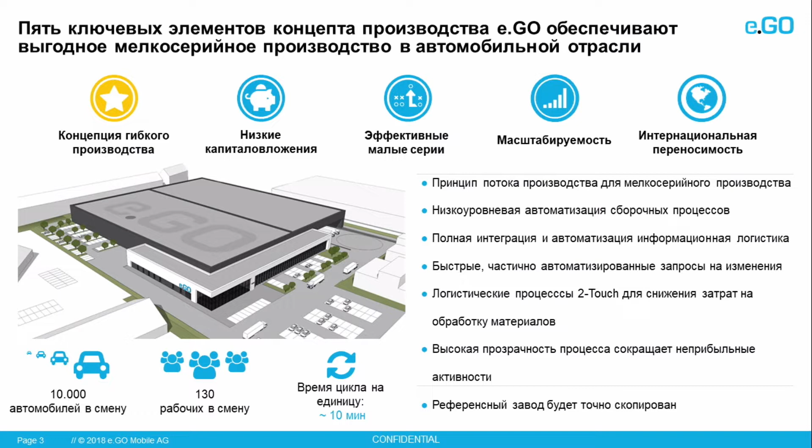In different stages of your production planning project, you need different tools. So as I mentioned this morning, it's okay in the beginning to have a very simple tool. We do a lot of workshops with our customers which are paper-based, which is a creative process.

We discuss a lot. We don't need any IT system there. We only document, and then we try to transfer this into PowerPoint layouts. We just move quickly the different elements, and we start to build a production concept. This is very simple, and you don't need a highly sophisticated IT system behind that.

But on the other hand, we also have participating methods, for example, where we do some very fast modeling of what the customer actually needs. Then we have like a table, and you can work with this table and show the layout to, for example, people working in your production line, and they can move objects, they can improve, and you can develop a layout out of this. This is already the second step. It's also a tool we use in our daily projects.

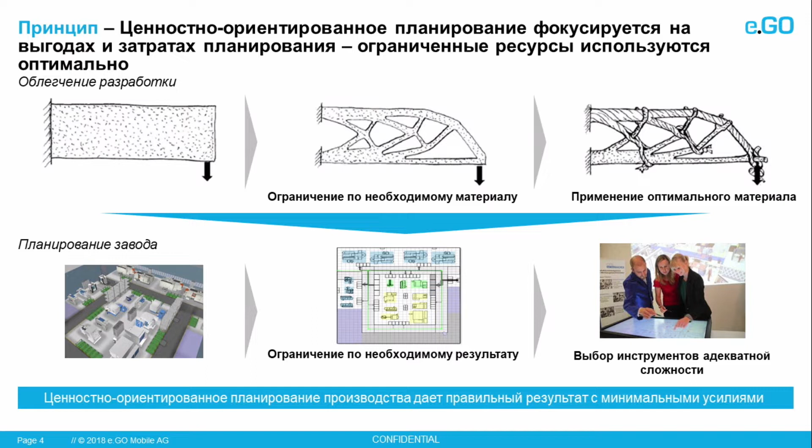This is our assembly line. We will see this assembly line later, our rear axle assembly, in virtual reality. But as you see in the beginning, our models are very simple. It's not like the nice pictures I showed this morning. This is nice for presentation, but the reality we work with looks like this.

We have the building structure already because this is already built, but the production line was empty at this time. There was nothing built, but we had the model.

We didn't know how this station exactly looks like, but we used simple blocks to just block this area. So we already knew, okay, we can't move there, we can check if we can see each other, if you have the material supply planned, and so on. So it's a very rough level of detail. And during our process, it's getting more and more detailed.

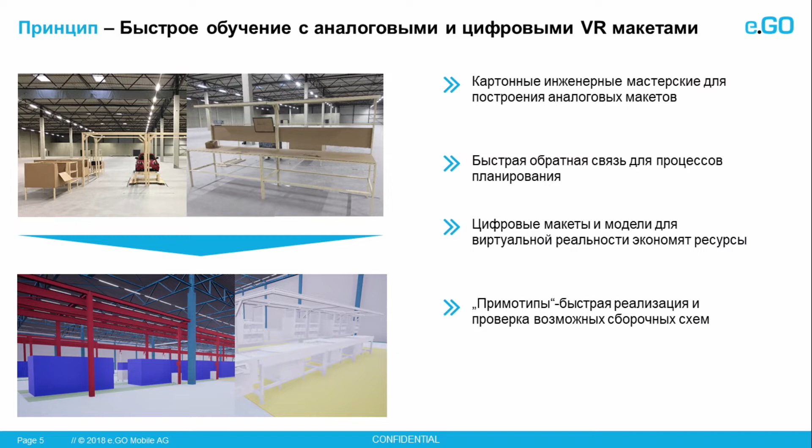The next step is that we get first data from the supplier. This data is integrated from our assembly line supplier. As you see here, this is not a very high level of detail, it's not very colorful, just white, and we placed it here. But in Navisworks, which I'll show later, you have the opportunity to walk around, use the walkthrough function, and we already checked if it's in the right place.

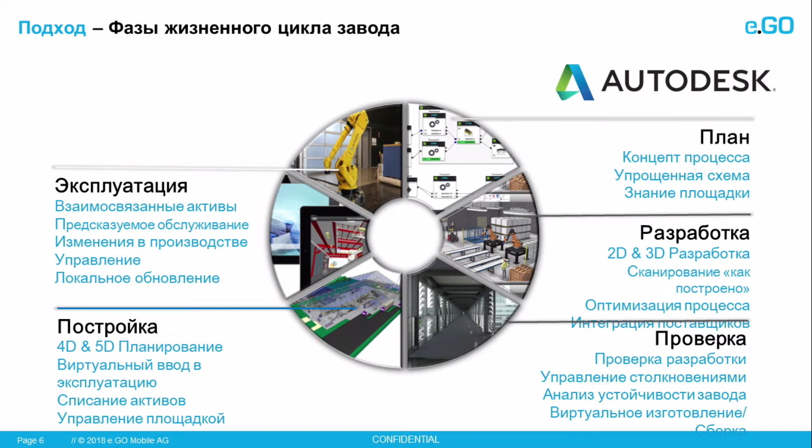Now I will show you different examples for each of these phases and how we actually use it.

First, before we use AutoCAD, we do a lot of workshops and concept work. We do this on paper or with PowerPoint, or our planning table - very simple tools to plan the first layout. Then we integrate this into AutoCAD.

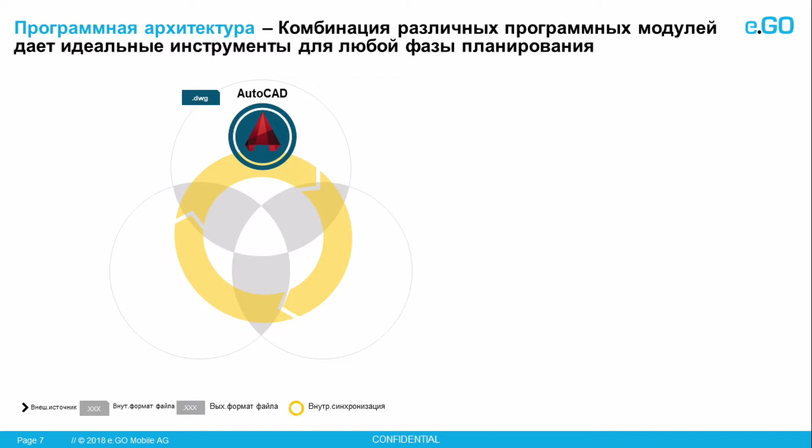It's always two-dimensional, just areas, space, and layout management planning. This is the basic work you have to do, and most of you do this today as a factory planner or industrial engineer. This is normal work.

Then in a second step... a little bit slow.

So then we still use a Factory Design Utilities. We have all the elements in there. We use these elements, we get the data from suppliers, and we model our own elements, but there's also a big database from Autodesk provided with the Factory Design Utilities. We use these models to generate better layouts in the end, and to start with the 3D planning.

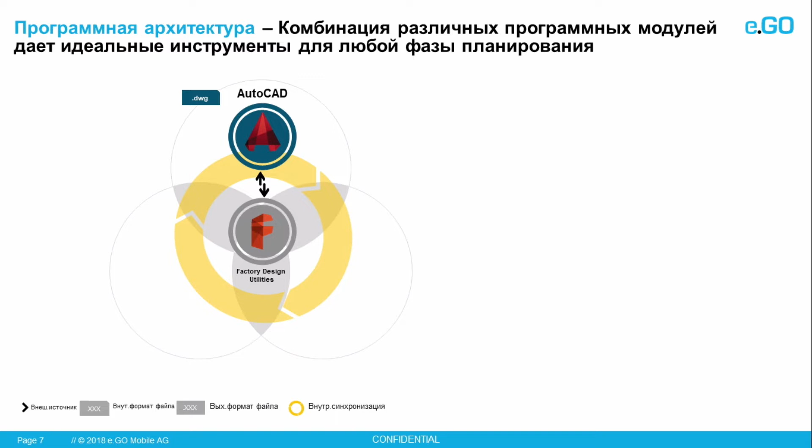And the 3D planning is done in Inventor, which is now directly connected to this cycle. So you also see the different formats here.

We are exchanging formats we use, but mostly the architects are working with Revit. It's like 70% of the construction projects in Germany are conducted in Revit. Every architect uses that software, mostly every architect, so it's normal to get data in Revit format. We use this for our whole building planning.

You can also use that for inventory and production planning, but we found out that actually the 3D in Inventor is pretty much simpler and easier. We have some more functions we need which Revit cannot provide, so we decided to build our 3D model here.

But just to mention, it's also possible to build everything in Revit. That always depends, there is not one solution. It always depends a little bit on what you really want to do with your data.

And then in the next step, we have a building model in Revit, a production model in Inventor, and now you have to bring this together. We do this with Navisworks, but this now is not working.

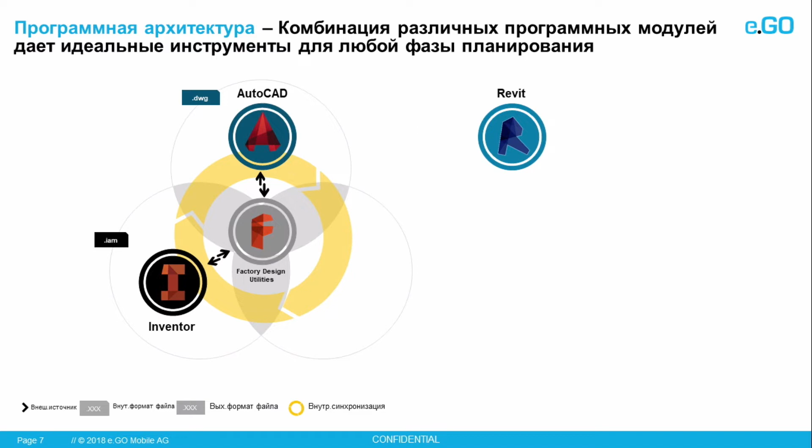Right now, if you have the virtual reality application, it's not easy to feed this back into the Revit model. So actually, we do workshops and then we adjust the model. I think there will be more development in the future to make this easier. But this is now one way which worked very well for us, using these systems for 3D planning for building and production layout.

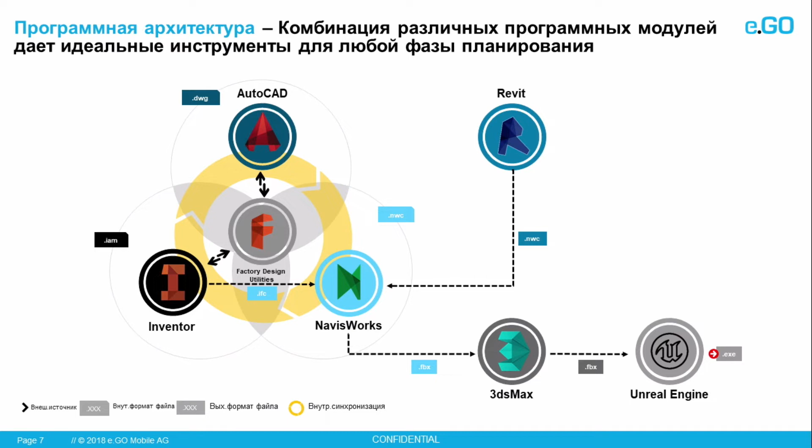The IFC format is also very commonly used in all the BIM standards. We try to find the right criteria and attributes for all the elements, and work on that constantly to improve. So our models right now, as you see this morning, they are functional, but we are still developing a better cycle.

So this is the overview of the systems, and now we'll have a short look at how everything looks like in the real model.

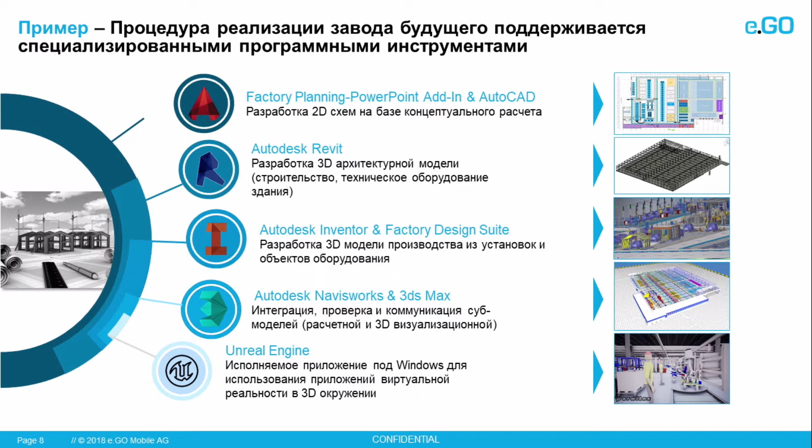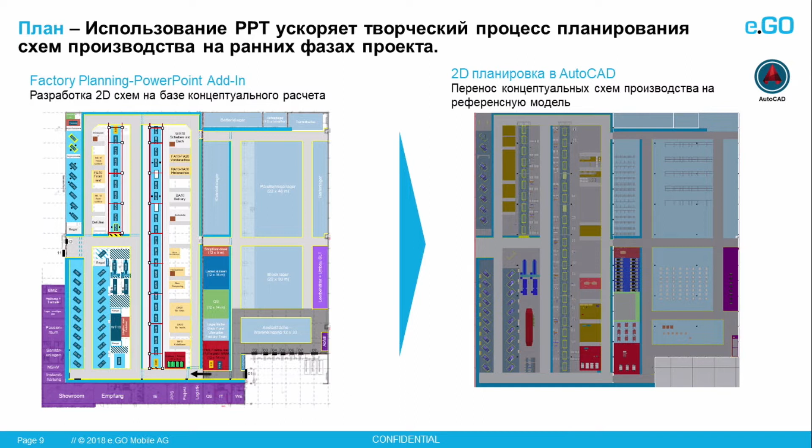The first one: left side is PowerPoint, right side is AutoCAD. We do all the very first concept work on the left side in PowerPoint. We just move the squares, everything is nice and easy, everybody can use it, no license needed. But then the point comes where we have to transfer this, and we never use it anymore. This is only for conceptual work, and after that we switched to AutoCAD and started with a 2D layout, which was pretty easy to copy.

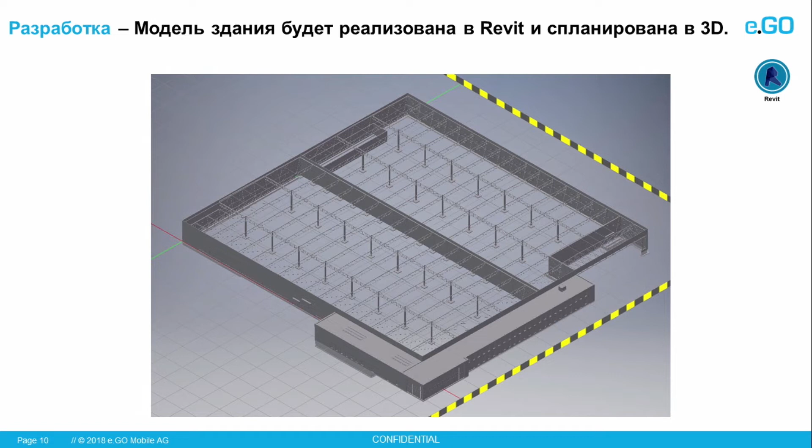On the other hand, we have this building model. This is our Revit model from our architecture. There's a lot of parameters and attributes behind that, but this is done in Revit, and it pretty much looks like you see here.

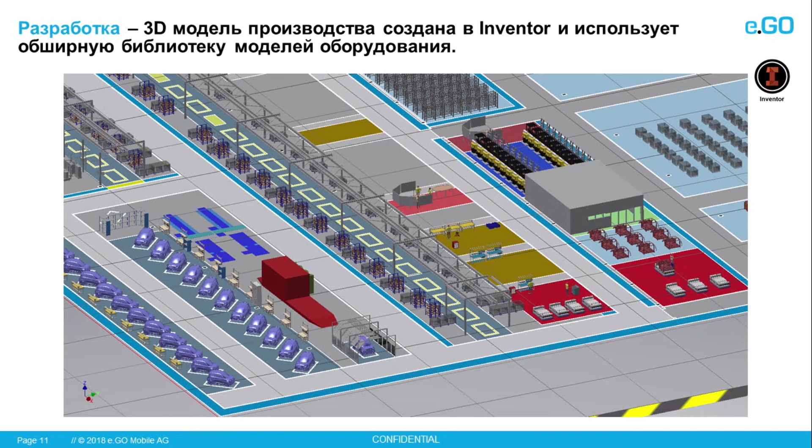What you're not seeing right now is the building - this is only the Inventor model. But now we need to bring this together because we need to validate production with building, and that's how it looks when it's coordinated in Navisworks. Now you have the building plus the 3D Inventor model of our factory.

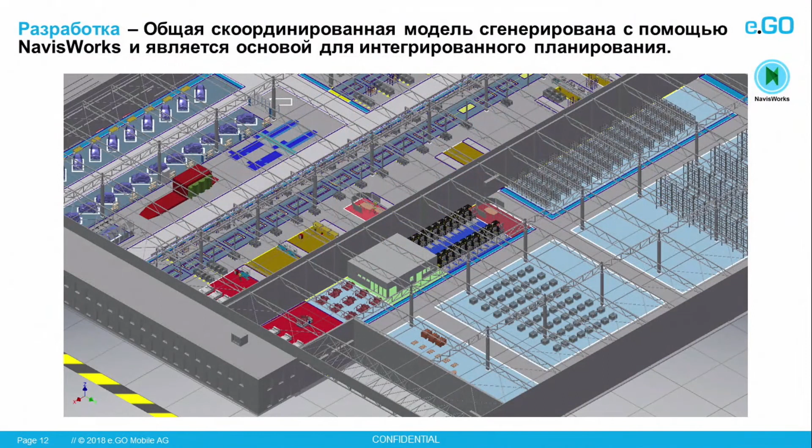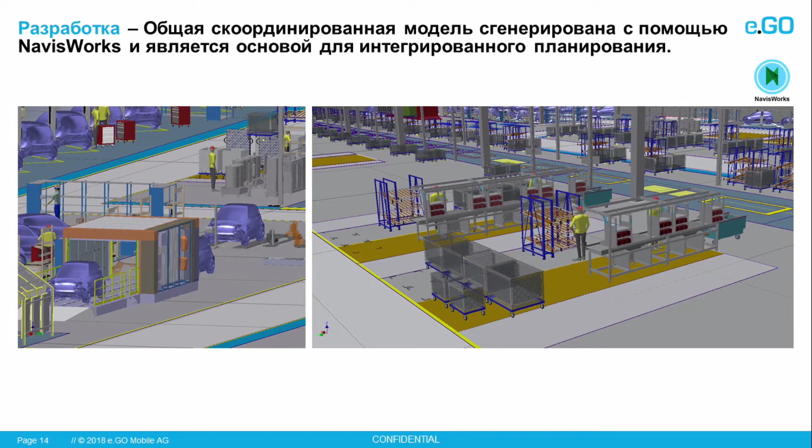But we always start with a very, very simple process. This is this kind of walkthrough function we use to walk through our model - like eye level, a little bit higher. You can walk and already validate, and this is totally enough for our industrial engineering experts to validate everything they are planning. They don't need more. They can also work with 2D, but this is much nicer to work with.

And that's how it looks in a nice rendering. This is our assembly line - we have 28 stations in a U shape. On the left side you see the rain cabin. This is an autonomous transport system which transports the car through the whole production line. We have a lot of overhead construction here with media supply, light, and worker instruction, but it's still a pretty manual process.

With this model, we do virtual reality validation. Our industrial engineers always can use it, we have an extra room for that. We have the model updated, so it's pretty easy. Within minutes they can start, and we do weekly workshops on the current status of our layout. For example, in our regular meeting every Monday, we use the 3D model and the virtual reality model to go through it and check if all data is there, if the planning tasks are fulfilled, if the right level of detail for every station is already there. Mostly we have very concrete questions before we start the meeting, and then we validate our questions in the meeting, and that's how we use the model.

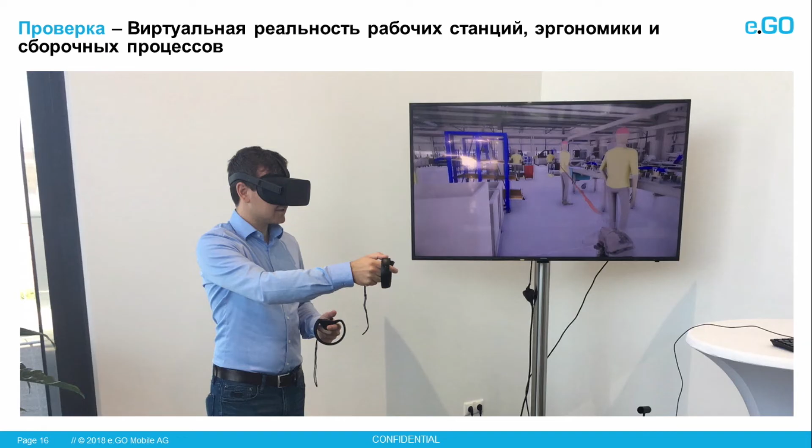Yeah, this is also end-of-line testing. Here we have our filling station, meaning media filling for brake, HVAC, cooling pipes, and so on. Because everything is pretty packed and very close by, you don't have much space in a car assembly line, so you really need to plan where to place your racks, where to place your toolboxes, what is the movement area, where to place additional handling devices. So we can plan all this in a 3D model.

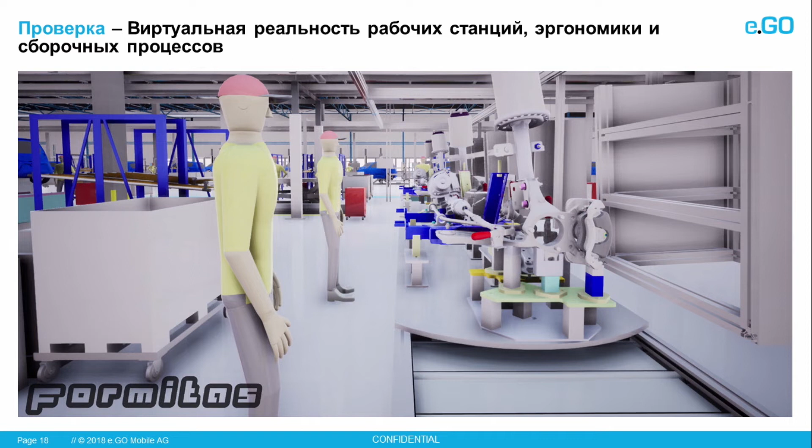This is again the assembly line. We saw this as a block, as wide supplier data, and this is how it looks in the final model, with real parts. So we integrate the real parts from PTC Creo, from our developing systems, to validate the assembly processes. We optimize our workspace here, the working stations. We can check for ergonomic arrangement of everything, check with handling systems, and we feed this back, change it in the model, give these screenshots to our supplier with remarks to change that, and try to have a closed loop.

This is one concept. This is not the final model, but this is what we pretty fast generated to check how we supply our material at the station. You see our tugger train supplying the material. This is for front axle, this is for rear axle pre-assembly, and we checked how we get the material here. You see the rest here is still pretty empty. This has been one workshop for optimizing the assembly line, and we always try to validate our processes with our 3D model in the end.

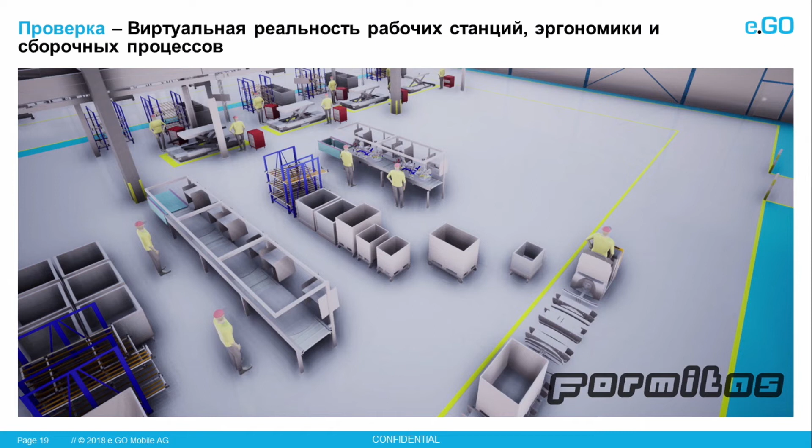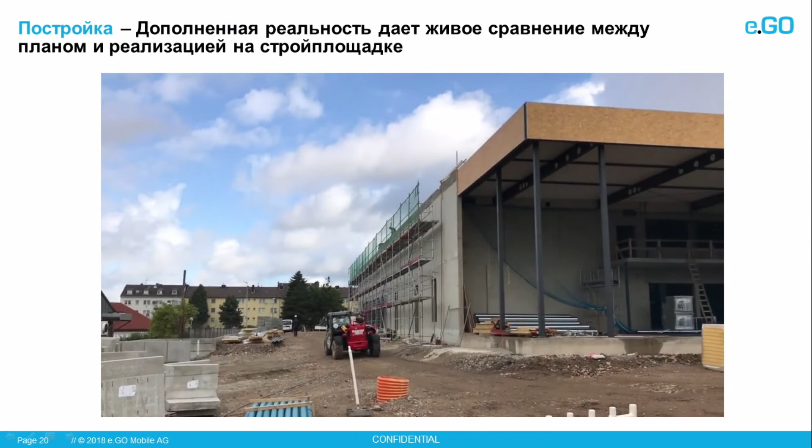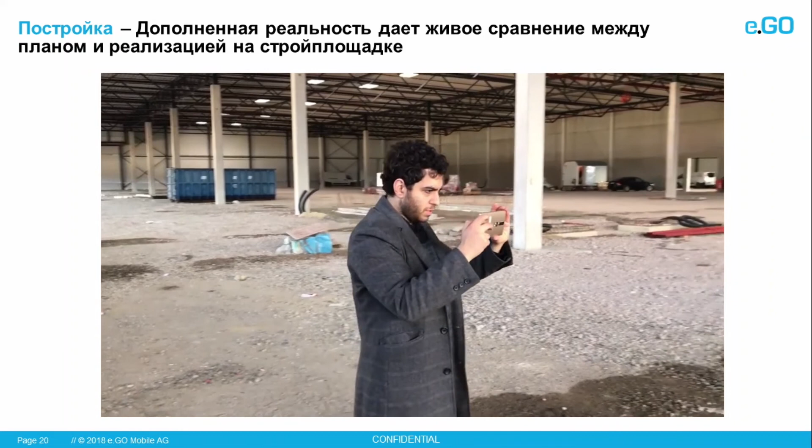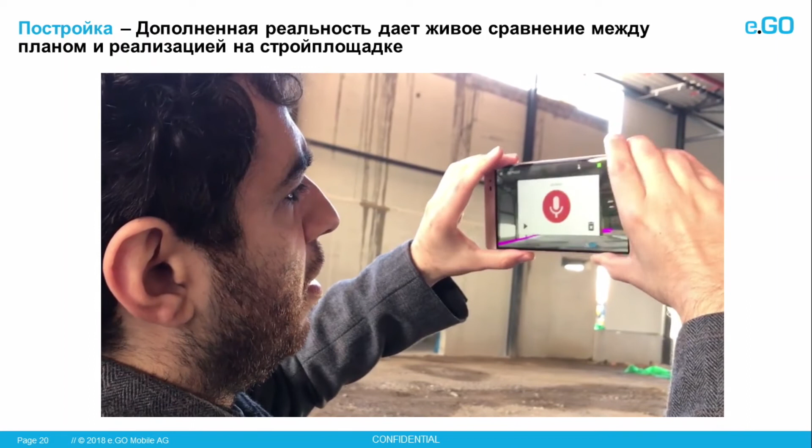And you have to start the video, which I showed also in the keynote presentation. It's very nice to validate this on the construction site. So what we see here in this video is only the Revit model we validated, but we also validated our Inventor model not on the construction site, but once the production hall was finished, we took our Inventor model and walked through the factory, and we can see in augmented reality, okay, there will be the rain cabin, there will be the end of line, this will be a walkway, and we can check our planned model against the actual empty production.

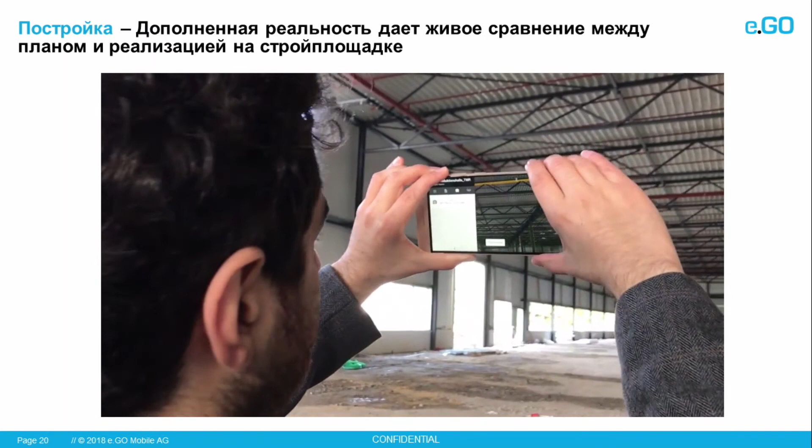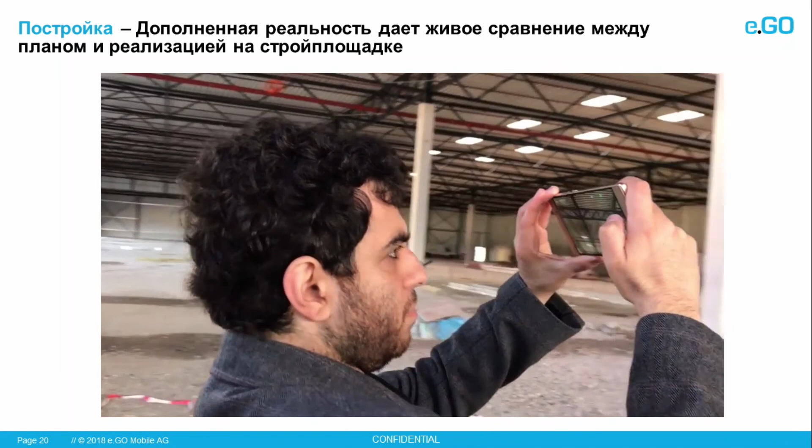This is a very nice function, especially if we get very big. This rain cabin is very big, and we can check before this rain cabin arrives, do we have all media at the right place, is there enough space when the machine comes in, and so on. There are many questions you can pretty easily answer with this 3D model of your factory.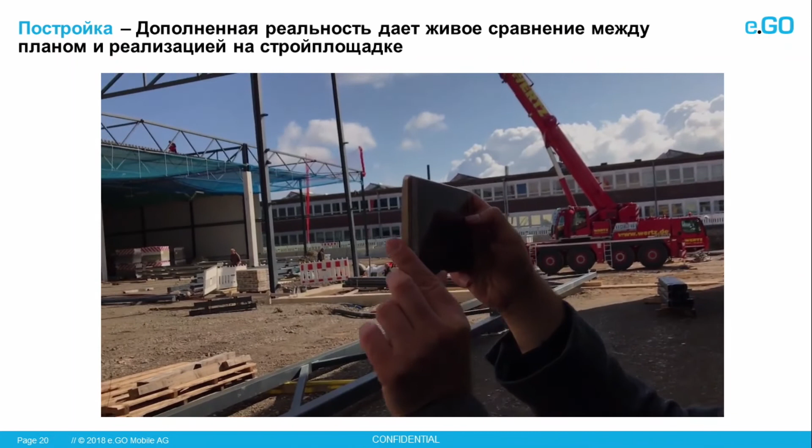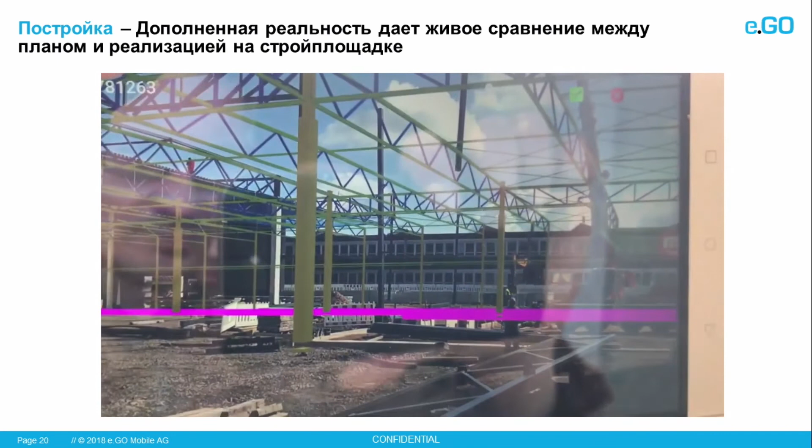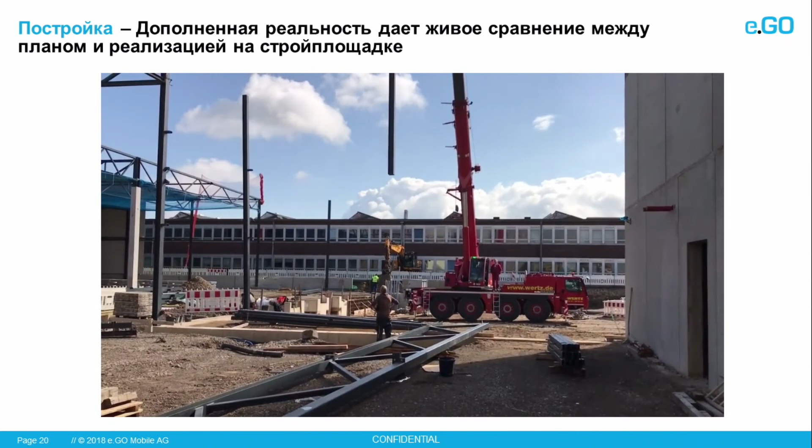And this was not very complicated. Two years ago we had no idea of Autodesk products, so we are also pretty new to the Revit world, Inventor world, BIM world. Of course at the university we use it and do research on that, but as a real user, this is new to us. We started to qualify a lot of students, assistants at our institute at e.GO to work with the software, and this wasn't pretty hard. I thought it's pretty hard to motivate the people, but actually it was quite easy, and we were able within one year to generate all these results we have. So this is all done by us without any big knowledge beforehand. So it's pretty easy to learn that, and I can just motivate you to get started with that.

You don't need the full 3D factory in the beginning. You can start very simple with only Revit and Inventor, and then develop and increase your level of detail and become like a full twin of your factory in 3D. But really start very easy, but start with that, and that will be much easier later. Once you have these basics, and once you have the architecture of the IT systems, it's very easy to use that later. But we still have some time.

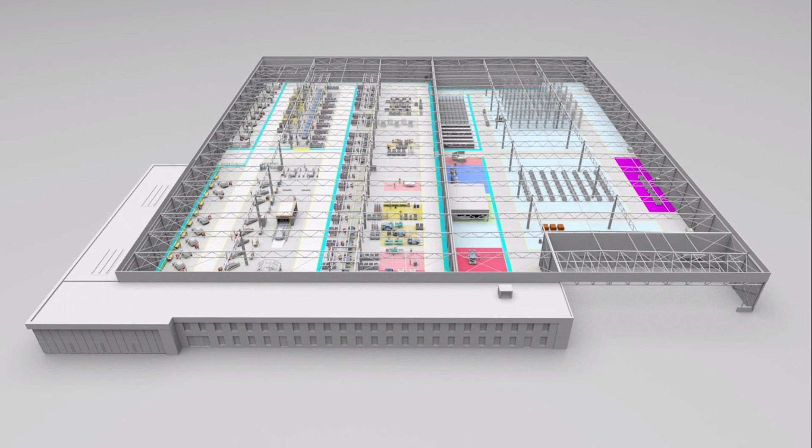You're welcome. Thank you very much.